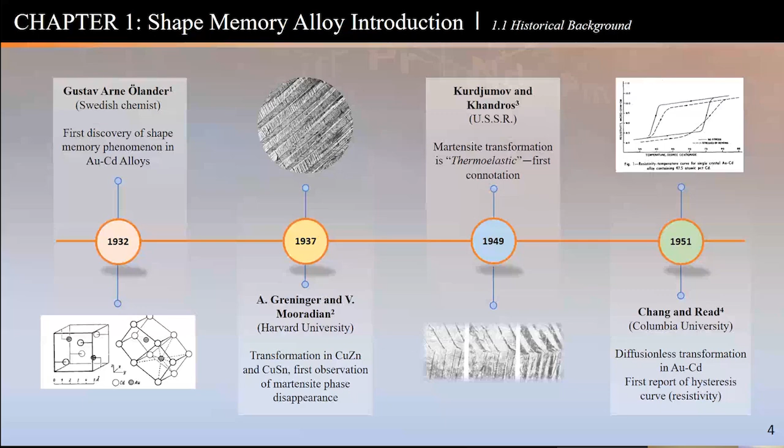First observation of these shape memory alloys was observed in gold cadmium alloys back in 1932. There were some advances as far as looking at the fundamental science, not really devices or components made out of these materials, but mostly scientific in nature, looking at what's happening in the microstructure or the mechanical response, but nothing designed yet.

So in 1937, there are a couple of different things in between years here, so I'm just highlighting some of the key aspects of these materials. Later on, as I describe what shape memory alloys are, you'll probably relate back to these authors that started it all back in the days.

You can see here that back in 1949, and the reason I choose different countries is to show you that the whole world was looking into these things back in the 1940s. These days we call them shape memory alloys, but a lot of people call them thermoelastics. Turns out that in 1949 was the first time the word thermoelastic was used, and I will describe that to you as we dive into it.

Then in 1951, there was the very first observation of this nature of curves here. These curves you've probably seen in the past, called hysteresis curves, basically a load or some sort of response as a function of temperature. That's what's used to describe shape memory alloys in the first place.

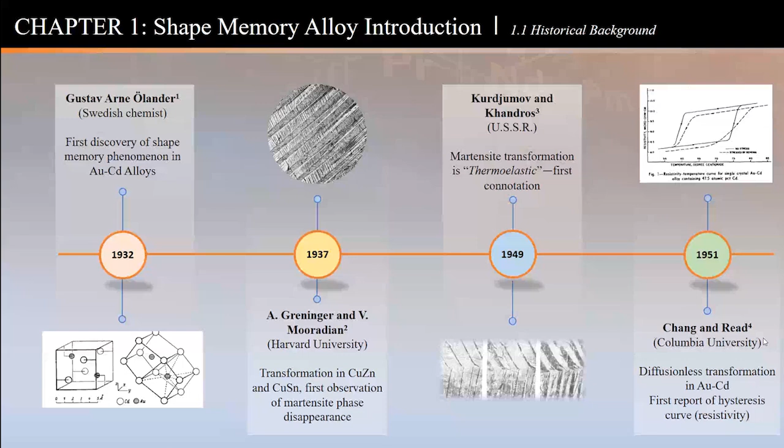So that was the very first observation or test conducted to show that you can get this dimensional change as you heat and cool. You get this envelope, this dimensional change in a gold cadmium alloy, also using resistivity. But then there was a major change here in the late 50s, early 60s.

Here's a picture of a gentleman by the name of William Buehler. He was working at a naval ordnance lab, and he was tasked with working on a lot of intermetallics, not shape memory alloys in specific. He made a number of different alloys, a number of different combinations.

One of those combinations was a nickel and titanium mixture, which created the very first nickel titanium alloy, also known as nitinol, for Nickel Titanium Naval Ordnance Laboratory. And that was done by Buehler.

In fact, if you read some of his biographies, he describes it. People say that it was an accident that this happened back in the days, but he described it as not really an accident — it was a planned discovery. And I really like that sentence. He was not planning to work to find shape memory alloys, but through his research and work on similar alloys, he stumbled on the nickel titanium formulation.

On that, what they actually did back in the days was sound checks. They'd take a piece of bar and hit it with something and it rings. This nickel and titanium, when they hit it with a rod, rang differently — much different than the other metals he made.

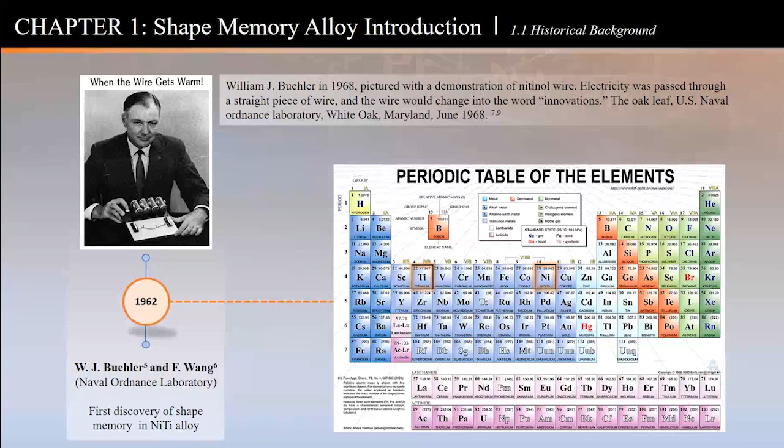They funded Goodyear and Battelle, and you can still find those reports out there. They did all kinds of characterization — thermal, mechanical, some of them magnetic, and all kinds of different tests. So after that, there were a number of different applications.

From my research, this is the very first space application that I was able to find, in the Nimbus spacecraft. It was actually a demonstration of moving these louvers using a shape memory alloy wire. So that was the first space application in 1968, or at least a demonstration.

In 1969, a group led by Andreasen designed these wires here, shape memory alloys for braces, and that was the very first medical application. After that, there were tons of different things that came up in the medical field.

This implant using what's known as superelastic alloys, which I'll describe in a minute, for orthodontic devices, was a major breakthrough until today. These are being used - if any of you have braces, you might want to check with your doctor to see if they are shape memory or not. Most likely they will be nickel titanium alloy.

After that, there were a number of different applications. One of them is for space. In 1970 was the first recorded aeronautics application, if you will. This is on the aircraft, a coupler that they use, shape memory alloy, to fix pipes on an F-14. That goes on into 1986 and so on.

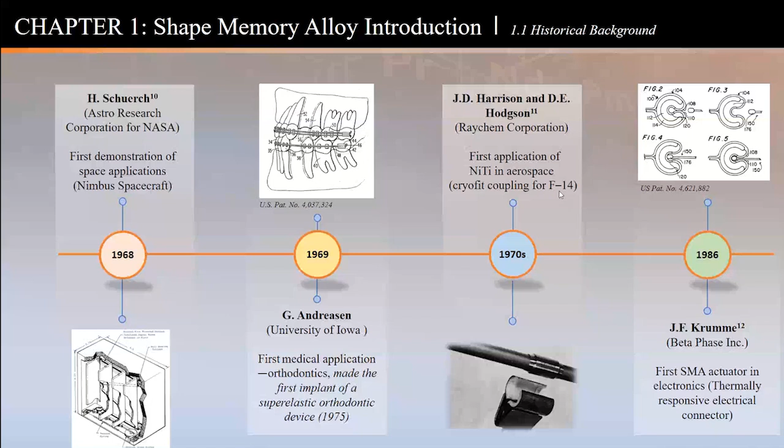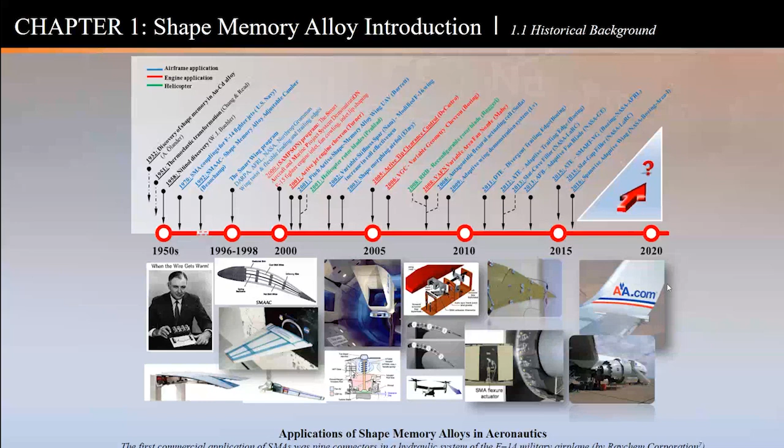I try to summarize them here from the beginning again in one chart. You can see there are tons of different applications, demonstrations, flight tests, wind tunnel tests in aeronautics up to today, 2020. There's also corresponding things for space - all kinds of different applications. Some are devices, some are demonstrations on all kinds of satellites, devices, probes. In fact, even now in the Mars rovers, I'll show you a picture later, they have shape memory alloys used for some deploying function or some sort of device.

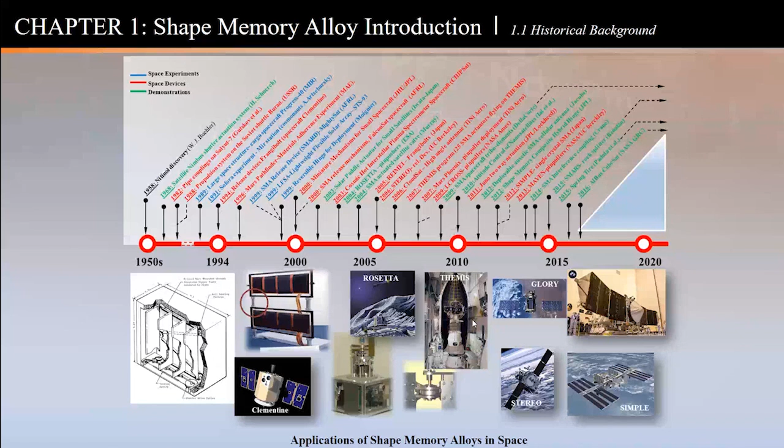So hopefully that gives you a quick rundown of when this started, back in the 1930s, with a major discovery in the 1950s by William Buehler at the Naval Ordnance Lab. From there, applications went left and right, using, I would say, a majority of nickel titanium, but as I'll show you later, there are all kinds of other formulations that people use or are using.

So what is a shape memory alloy? Look at the name - there is a shape, there is a memory, an alloy. An alloy here refers to just a metal, a mixture of different elements. But this alloy has a memory - the material can remember multiple states. It can go back and forth from one state to the other just by applying load, temperature, or some other stimulus.

Now imagine you have a cube of ice that goes to water - that's a phase transformation, going from a solid to a liquid. Shape memory alloys are similar - they go through a phase transformation, but this is solid to another kind of solid. There is no melting involved. It's just like if you have a cube of ice that goes to a triangular piece of ice without melting, just by applying a load or heat or some other means of inducing such a transformation.

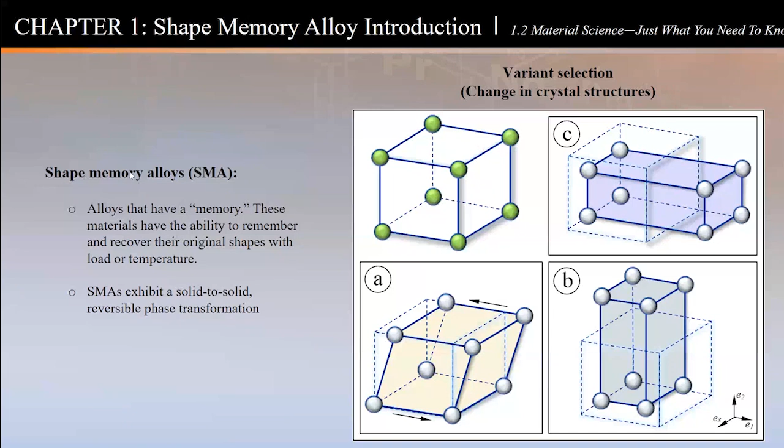Let's look at what gives it that unique property. I was describing elastic and plastic. Just to recap here, in plastic deformation, it's permanent.

So now think about these blocks I have shown, and I have a little square to show you the parent phase, that austenite phase again. So when you apply heat, or deform it, or cool it, or deform it, it goes to this sheared kind of geometry.

So when I load and unload, or heat and cool, and so on, I go from this little representation of the cubic austenite phase to this little representation of some other lower symmetry martensite phase.

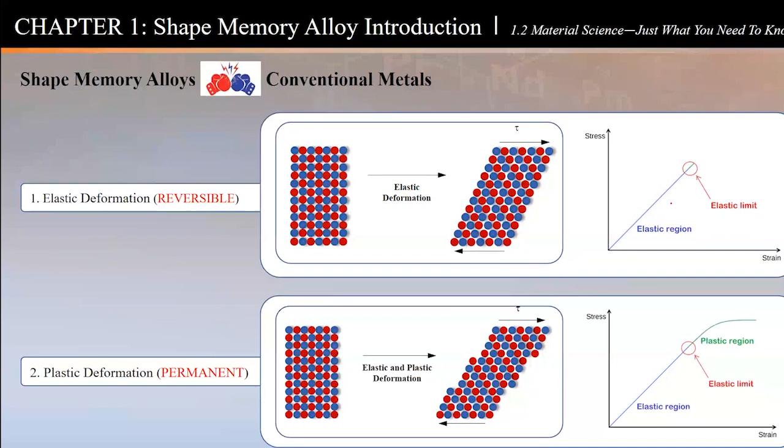So this recovery could be in the order of 10 times more than the elastic portion of your conventional metal. A conventional metal, aluminum for example, you can deform it 0.6%, and that's all reversible. This shape memory alloy, you can deform it 10 times that, 6% fully reversible strain. And that's the power of shape memory alloys.

So keep this principle in mind: this is reversible, and it happens via a phase change, a phase transformation from a higher symmetry parent austenite phase to a lower symmetry martensite phase. That's how this happens. Here's a quick picture for you. Remember these little twins that you see here.

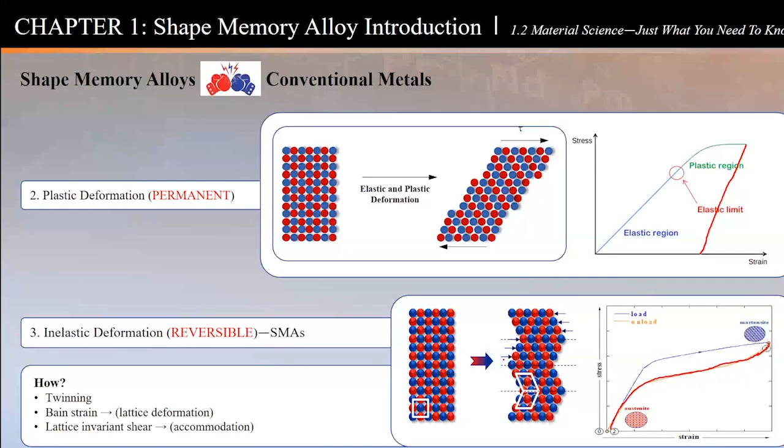So if we go in a microscope and look at the cold states in the lower symmetry, the martensite phase, here are those little ridges that I just showed you. You can see how they're going back and forth. This is actually a real microstructure. It looks like this. This is how it accommodates that deformation. You don't break a plane, they just go into these twin modes that you see here.

And now if I take this same metal, same microstructure, and I heat it up, what happens? It goes to the higher symmetry austenite parent phase. And this is the microstructure of the same material. You can see, just like you have your conventional aluminum or steel, titanium, grains next to grains next to grains. Sometimes it's hard to believe this is the actual same exact material, just heat and cool between them. It goes from this to this.

And as this is done at a microscopic level, but the end result, if you take a component, because this little grain is going to here and the next one is going to here, you have a macroscopic deformation that is reversible, controlled by temperature or load or some other stimulus. So hopefully this gives you a good idea of what shape memory alloy from a microstructure level looks like, the terminology used to describe shape memory alloys, the austenite martensite, and why it is reversible.

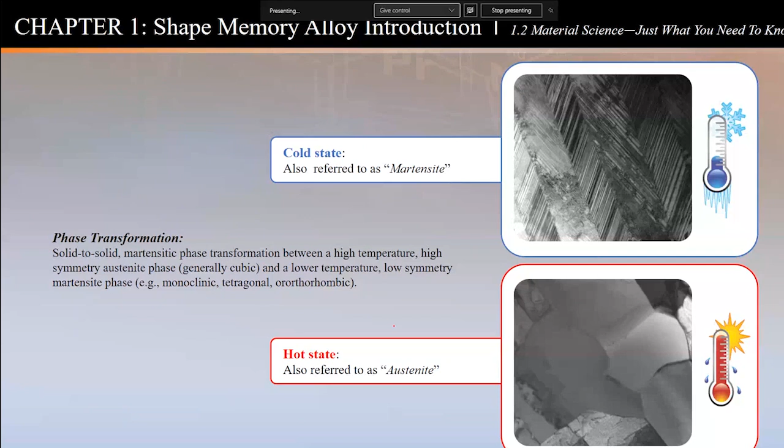Here is one version of the shape memory alloy, and I'm going to describe it here. So we start, hopefully you can see my little pen here. I'm at 0, I'm in slide 13. So we start from 0, and this is the austenite phase, and I just told you it's the parent phase and it's the cubic phase. I cool it under 0 stress, 0 load to 1. Nothing happens. It just accommodates this little square that you see into some twin mode that you see here. Nothing happens. No macroscopic changes because that twinning that's occurring is very small.

Now I'm going to take my piece of metal and deform it. I'm going to go from 1 to 2. If I didn't tell you anything about this material and I unload to 3, it could look like elastic plastic deformation, like you pull on a piece of steel. Okay, if I don't show you the bottom half here, just the blue curve, load to 2 and unload to 3, remove load. So this deformation, in the order of 6 or 7% in some alloys, is isothermal.

It's done at a constant temperature, say, for simplicity, let's say room temperature. If I go from 3 and now I heat this material, I apply heat. Once I apply heat, this material actually recovers. It goes back to 0. And in the process, as these phases are changing, the phase transformation is occurring. It goes from some sort of low symmetry microstructure to high symmetry. I recover all this deformation, just like the metal was never deformed before. So this mechanical deformation is recovered by this heating.

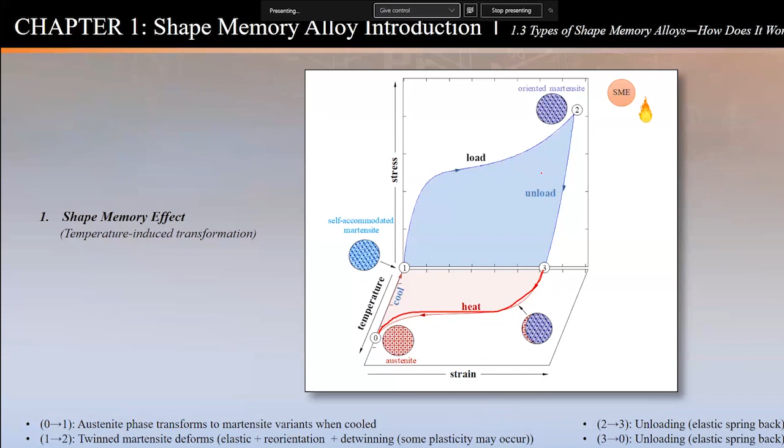So you have to apply heat for it to recover. It's known as the shape memory effect. Now, in the shape memory effect, if I take this plot here, this bottom curve, and just look at the 2D, forget about the 3D plot now. Let's start at room temperature right here. I'm right here. Now I start heating under a load. I take a piece of metal, I apply a load to it, 2, and I don't unload. I stay at 2. So this is a fully loaded metal or component, and then I heat.

As I heat, I go this way, and then I generate quite a bit of displacement. Where is it going? It's going to the austenite parent phase, and when I cool, again, it follows the same path. Some of you may think that it follows the same path as it goes this way. Well, that's one way to do it. But actually in most shape memory alloys, the path that it takes is this way, and so on. I'm exaggerating this to show you what's happening in shape memory alloys. So how does it start first? Let's go back to the red.

To the red here, and when we start heating, we reach some critical temperature known as AS. Probably some of you may be guessing what AS stands for. So when I'm heating, I'm going to the austenite.

So I start my transformation and I go to AF. You can guess what AF stands for. AF stands for austenite finish - that's the end of my transformation.

So now I keep heating around here, nothing happens. No change in dimension. The strain could be displacement, could be twist, could be elongation, could be shrinking, whatever the component might do. Now when I'm cooling back up, I'm going to cool my material.

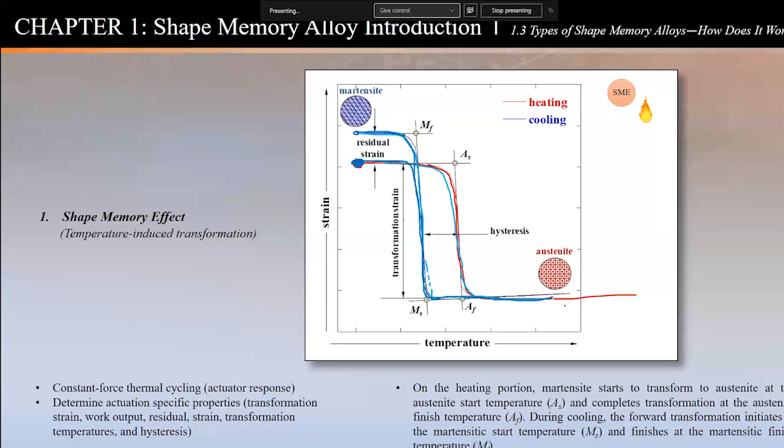This is just in a cartoonish way what it looks like between temperatures. Again, when I'm heating, I go through austenite start and finish - it goes to the austenite phase. And then when I'm cooling, it goes to martensite start and finish, and it goes to that lower symmetry twinned microstructure. Now the second type - the first type is shape memory effect.

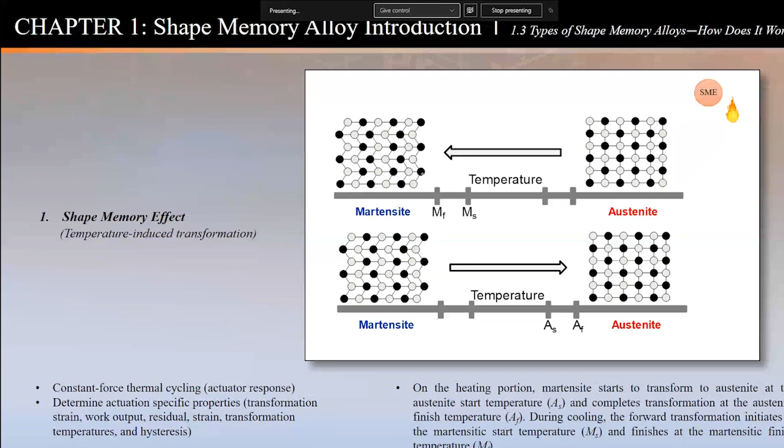I can change the material by applying heat. Not always the same - you can do it also by what's known as superelasticity. Some call it pseudoelasticity, I refer to it as SE. It stands for superelasticity or pseudoelasticity, and basically it's a stress-induced transformation. How does this happen?

Now I'm sitting at 0 here. My microstructure is austenitic, okay, cubic. I start loading this material. At some point it starts transforming to martensite, and then finishes the martensite. And then as I reverse the load, it comes back through this path, austenite, and then it finishes the austenite.

This is just by pull it and let it go, basically - load and unload. And this is fully reversible, what's known as superelasticity, also known as pseudoelasticity. The principle is the same - it's a phase change. It goes from this nice cube to the shear components, and once you unload, it goes back to this cube. So the underlying principle is exactly the same, except that this is triggered by load versus the shape memory effect, or SME, which is triggered by temperature.

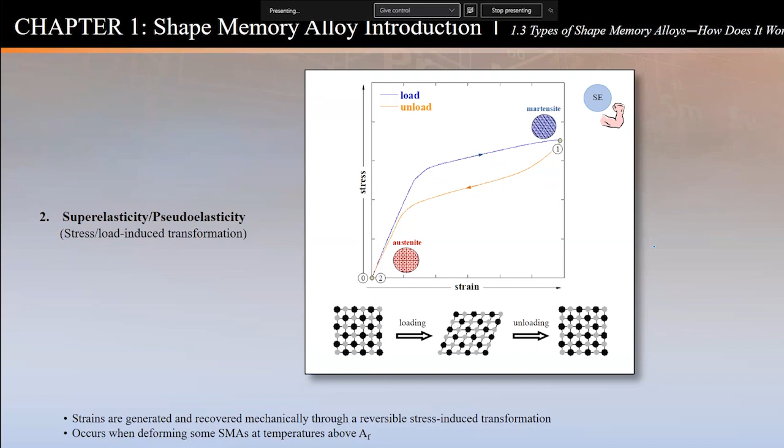Please, if you have any questions, let me know. There's another - I'm on slide 18 of your package. There's also other ways to move the shape memory alloys depending on the composition.

There is magnetic or ferromagnetic shape memory alloys that you can change the microstructure by applying or removing a magnetic field. This could be advantageous where we have a magnet available, or you can guess already that if you have, for example, a shape memory effect, you have to introduce heat and you have to remove heat. So that means time. A magnet you can turn on and off much easier, faster.

So this means you can choose one or the other depending on the application. If the application requires high frequency, you need to actuate or move something very quickly, maybe a magnetic shape memory alloy is the way to go. If you can afford a few seconds to heat and cool, or if you don't have a magnet, then you can use the shape memory effect. Or if none of them, if you have a place where you can apply load and remove load, then you use the superelasticity.

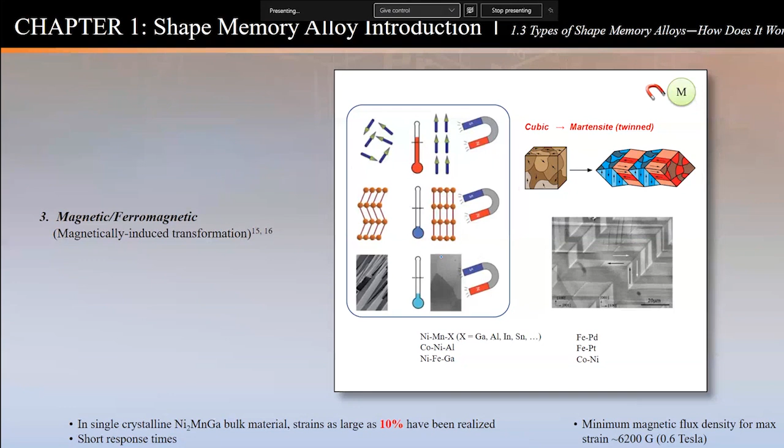And just for completeness and awareness, there are also shape memory polymers, the same kind of principle. You can heat them and cool them, but of course also you can introduce light. There are some neat principles of light-induced transformation, heat and cool. And for some very high temperatures, there's also shape memory ceramics, the same exact principle, but they're not metals, they are ceramics.

Okay, so that's about shape memory alloys, how they work, what types we have: magnetic, mechanical, polymers, ceramics, and so on. And here I wanted to introduce you how to form a shape. So how do you introduce that memory? Imagine you have a square and you want it to now remember to be a triangle. So you have to form it into a triangle.

So that process we call shape setting, okay? Or the good example is if you have a straight wire, but you want it to be formed into a spring, formed into a coil, like a helical spring. How do you do that? In the world of shape memory, we call it simply shape setting.

So if I take my metal and I apply some load to it, stretch it, just like this coupon shown here, and then I heat it under a constraint. So I hold it so it doesn't move, like in a jig or a platform, something that holds it in place. And then you heat it and cool it. Suddenly the new shape is this long shape.

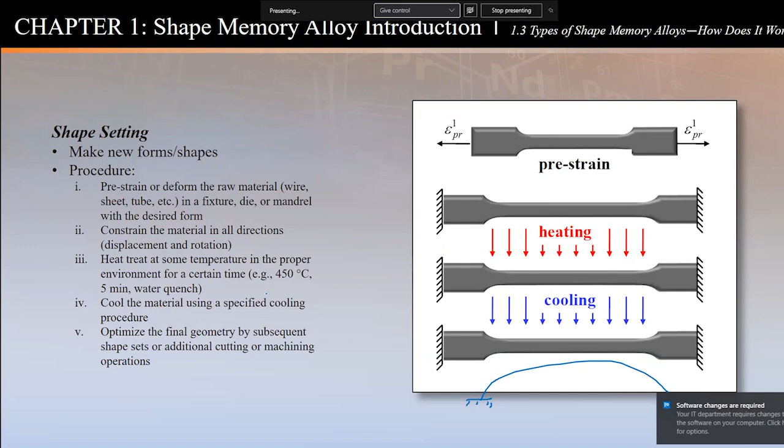And we do that also. Here's an example. For instance, these little springs were a piece of wire. We take little mandrels, cut some threads, wind this wire in there, put the sleeve to hold them in place, throw them in a furnace in the sleeve so they don't spool back out, heat them and cool them under some temperature environments and so on.

And finally, you have a new form of that wire. This wire now, if you apply a load to it, like a helical spring, it will shrink and contract and extend and so on and so forth. This is the simplest form of using shape setting procedure to create a new geometry, whether it's a spring or a beam or a triangle or whatever it is that you're trying to do.

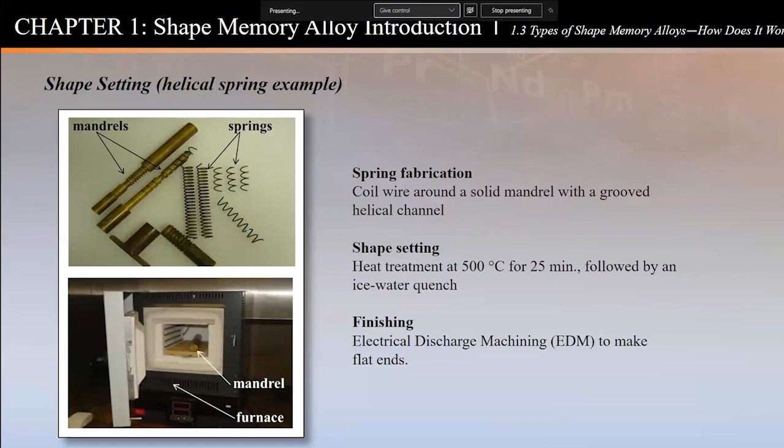Okay, so I just want to go through a few examples here before we start doing some exercises. Comparison: shape memory alloys, particularly the ones actuated by heat, shape memory effect, are prime users for actuators. An actuator basically is something that you can use to move or control a system. An example here: electric motor, a hydraulic system, a mechanical rack and pinion, and I put thermal here for SMA. SMA stands for shape memory alloys.

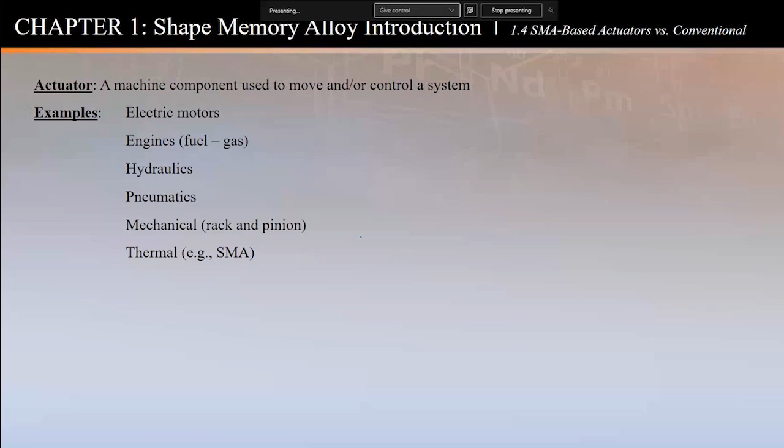Here is just a quick, simplified example of an electric motor. You need power, converter, cables, and so on to build the motor to move something from position A to position B. Here's another schematic of a pneumatic system, a hydraulic system, and these are what's required. And then you can go into a thermal system, which is shape memory alloy, that looks something like this. And what I'm trying to show here is that a shape memory alloy actuator can be a very simplified form, can be very lightweight, can be very compact, and do the function that your electric motor or hydraulic motors can do.

Now you have to trade it properly. You have to look at the other aspects. One thing is having a lightweight, compact actuator that costs a million dollars versus having a hydraulic motor that costs a hundred dollars. So there's cost weighing in there. There are other things you need to look at as far as life, maybe frequencies and so on. But in a general sense, where it makes sense, shape memory alloys are known to be very lightweight and very compact, that you can package in tiny places where having a motor like a pneumatic or hydraulic one, there's no hope of doing that anywhere.

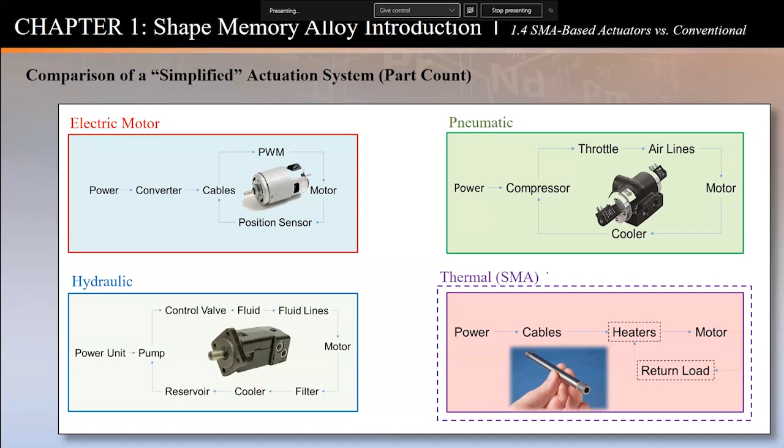So here's what I just described. One thing especially for us at NASA, for space applications, if you have some sort of deployment mechanism, if you're going to deploy a sail, a panel, a boom, or fairings, SMAs are debris-less and spark-free in operation. You can apply a signal and there's no sparking, no debris like you'd get with explosives or pyro devices to release things, and no shock from the explosion. That's a very neat benefit from having shape memory actuators do such a thing.

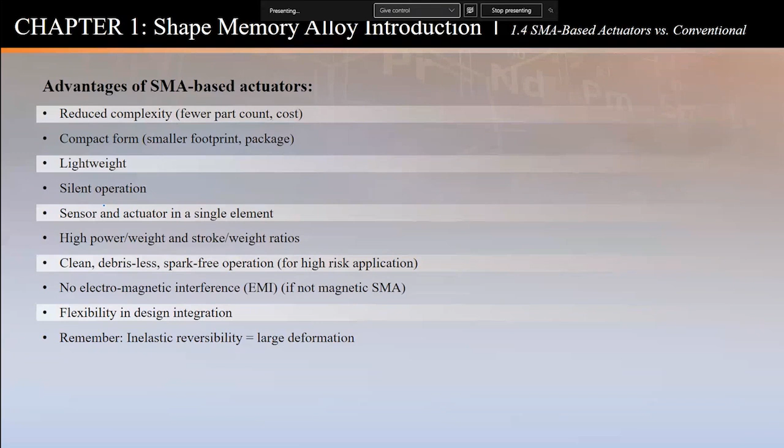Silent operation, you don't hear it. In fact, there are some cars in Europe that replace the mirror adjustment mechanism. When you adjust your mirror, you push that little button and you hear that zzz going on. Well, some high-end cars don't want to hear that, so they replace them with shape memory alloys, which are very silent. Again, is that the right application? I don't know, but it's there. Maybe there are some applications out there that require such quiet operation, and so on and so forth.

This is just a few screenshots here to show you the comparison of power-to-weight ratio as a function of weight. Again, in this example, the SMAs are down here. Weight-wise, they are very lightweight, and they can perform like many other actuators in its class. Of course, if you go up here to hydraulics, you get a lot more power, but you get heavier. So this shows that SMAs can be light and can still produce very high power.

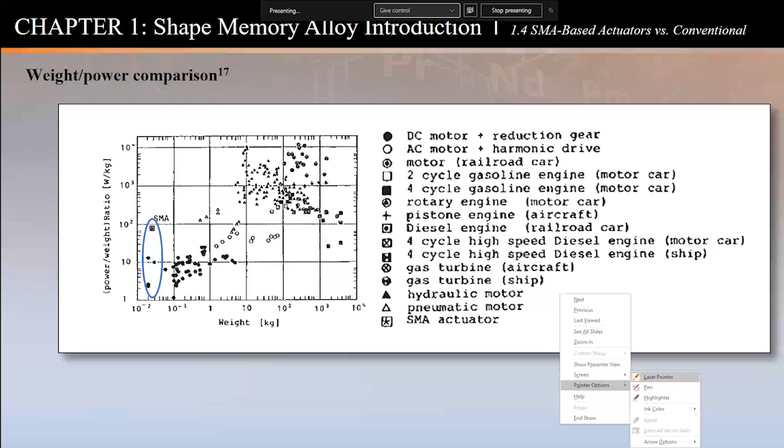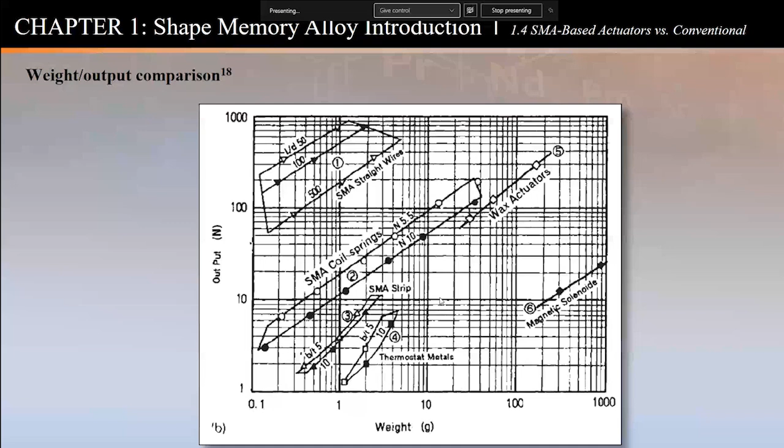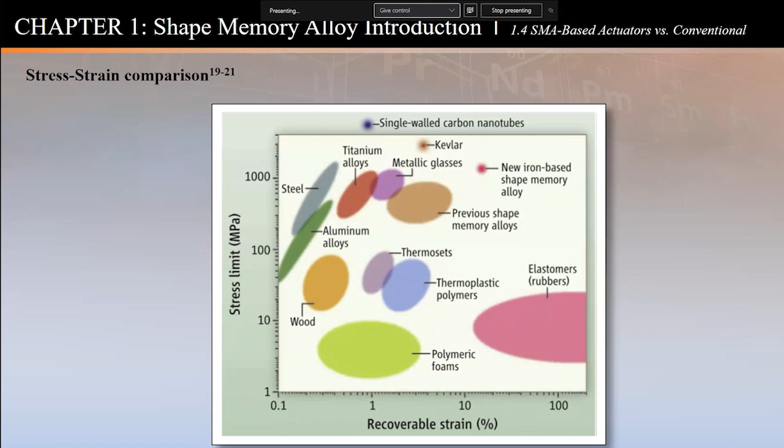You can switch a magnet on and off very fast versus nitinol, which is shape memory alloy, conventional nickel titanium. It gives you a lot higher specific energy, but at a knockdown on frequency. So this is something to keep in mind.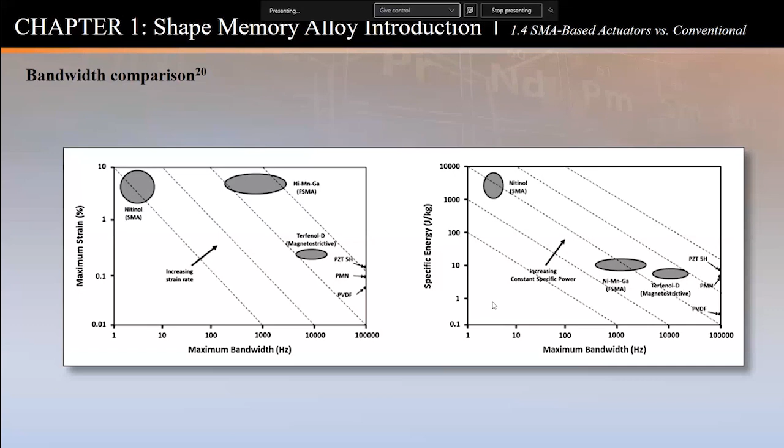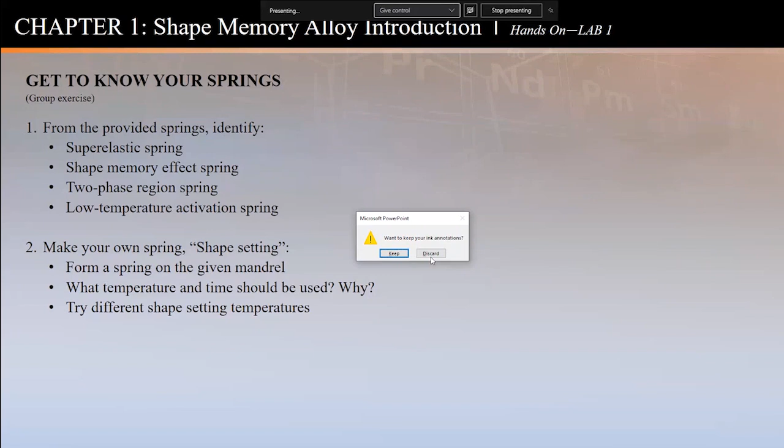So with that, I listed this, by the way, when I was going through the slide. When you see these numbers here, they refer to the original work, so you get a chance to go look at the whole story there. So I summarized them for you here. What I would like to do next, typically we have an exercise where you can build your own springs and stuff, but because we can't do that, I prepared this little document here where hopefully we can work together.

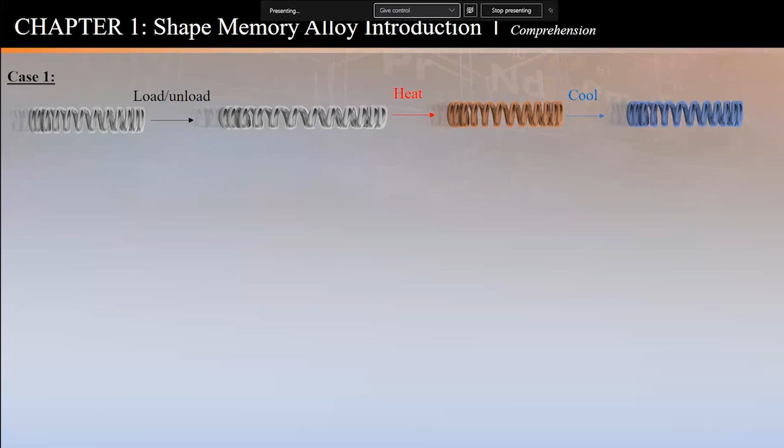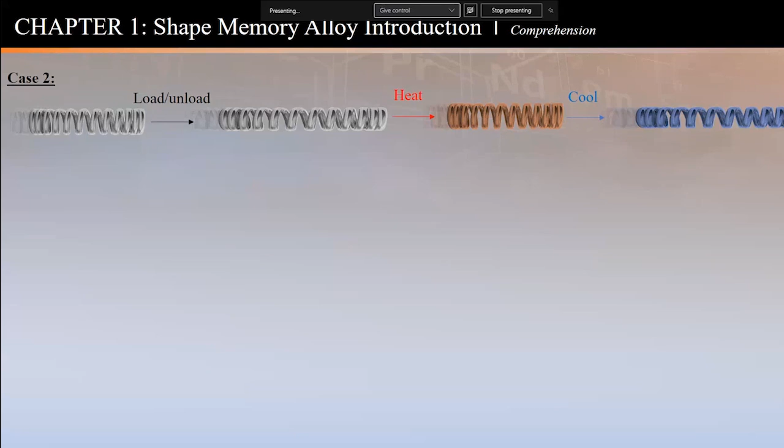It's the shape memory effect, which is the temperature-induced transformation, but there's a layer on top of it. It's called two-way. The previous one, if I take this spring and I cool it, well, nothing happens to it. Now, if under no load, under 0 applied load, I heat, it goes back to 0. Now I cool, it goes back to 1. Hopefully you can see my pointer. It actually behaves like an actuator here under 0 stress. This phenomena here is called two-way shape memory effect.

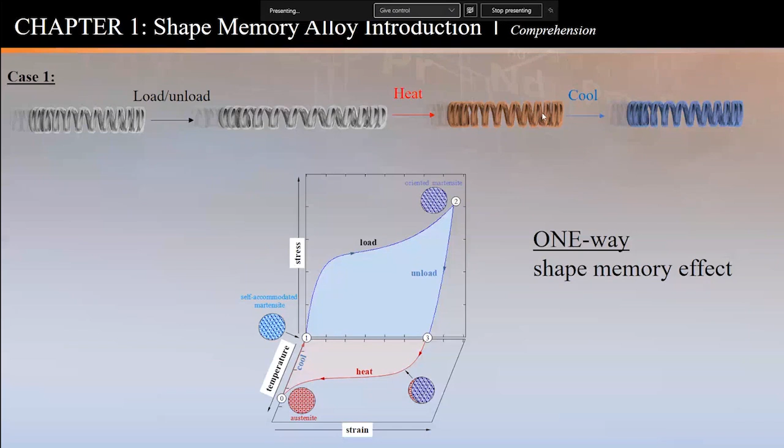The difference here is: one way, once you heat and cool under 0 stress, nothing happens. But in two-way, as you heat and cool under 0 stress or 0 load, it remembers two states. It remembers the cold state and it remembers the hot state. This phenomena is very useful when you have components with very little or 0 stress at all, and you want it to remember two states, like close a valve, open a valve with no load, or a switch or a breaker or what have you. So remember, this one is very useful. It's called two-way shape memory effect. It's also shape memory effect, but it has two memories versus one, if you will.

Good, let's go to this case here. Okay, now I'm going to load, but I'm going to keep that load. I'm not going to remove the load. And then I'm going to heat it and cool it. And then heat and cool.

The only difference between this one and the previous one is: the previous one is one-way shape memory effect, but here I'm biasing it. I'm applying an external load and I never remove it. Imagine you have a spring and you hang a dead weight on it - that's what I do in the classroom. If you heat and cool that spring, the dead weight goes up and down. So there is an external load applied to it.

Now in the two-way, there is no external load, but there is an internal load. So the principle is exactly the same: take a spring, hang a dead weight on it, heat it and cool it, and it stretches and comes back up. In two-way, imagine I chop off that dead weight and nothing is hanging, but the spring is still going up and down via two-way.

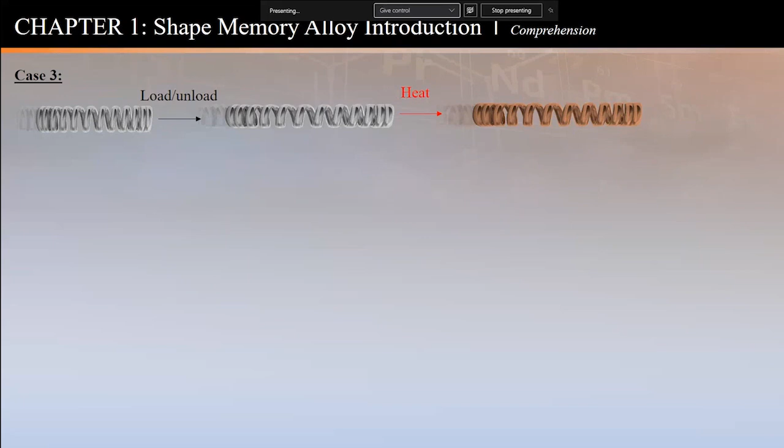So we'll go with plastic, and the answer is no. This is simply plastic deformation. It's not even a shape memory alloy, it's just a metal - that's how metals behave. You pull it past the elastic region into plastic deformation, you heat it or not, it's just gone plastic. There's no recovery. It's just an example to relate it back to what conventional metals look like. So it's not a shape memory alloy - there's no recovery, and the heat didn't do anything to it.

Can I ask you a question? Yes, you can. You talked about the one-way shape memory effect and the two-way - what's the difference? Is it a different material?

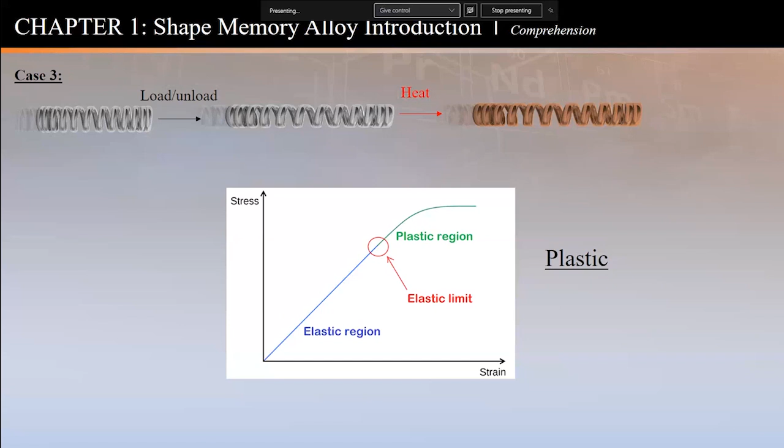No, this could be the same material. When you make a two-way, when you program or train or condition the material to remember a two-way, you have to condition it quite a bit. You have to apply some thermomechanical profile into the metal to create back stresses, internal stresses. So as you heat and cool, there's a stress on the grains that pushes it one way or the other. That stress is internal to the metal, and you have to do a lot to get that, versus one-way plus bias.

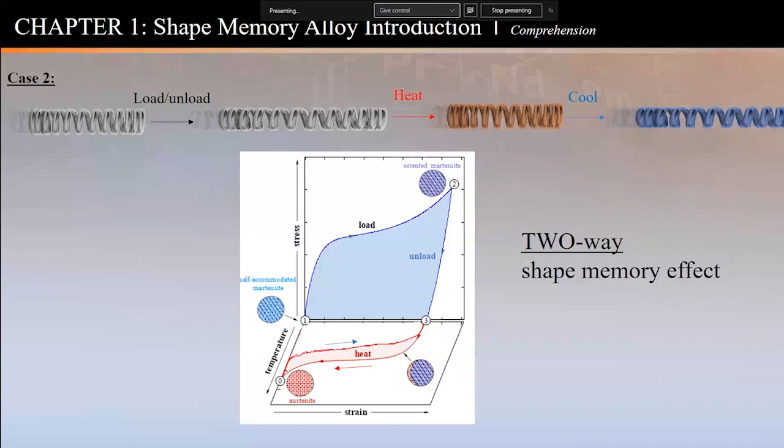If I had no bias, no applied load - and I'm in slide 33 now - if I have no applied load and I cool it, it stays the same length. But because I have an applied load, it forces it to stretch again, and when I heat it, it remembers home, and so on and so forth. But this relies on an external bias, an external force. Does that answer your question? Yes, thanks. You're welcome.

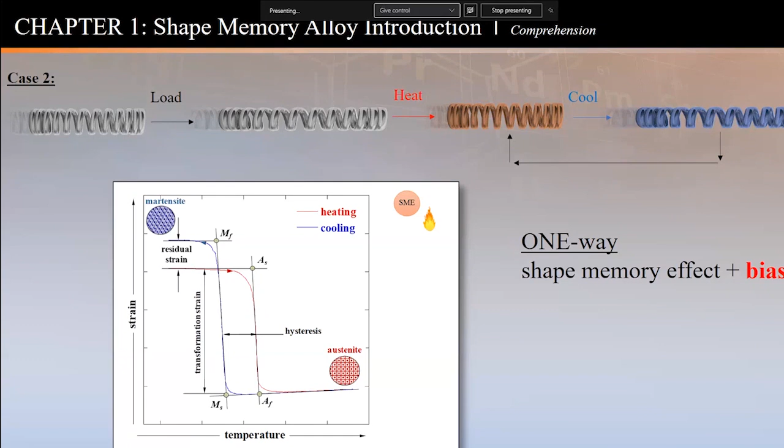Back to this example: I take a spring, I load it, stretch it like this, and then unload it, and it goes back to this condition. What do you think this phenomenon is? Just elastic. Very good - just pure elastic. You get your spring back.

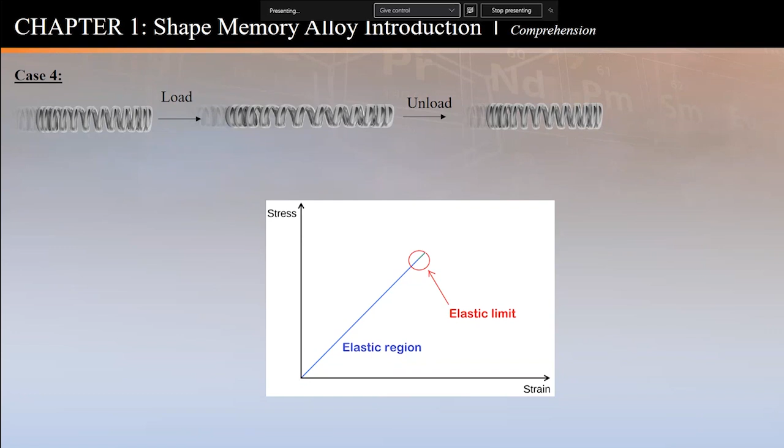Now, if I take it one step further - forget about this image, it's for a different example - if I take this spring and pull it ten times more than elastic, and unload it, and it comes back to the initial shape, what do you think this phenomenon is?

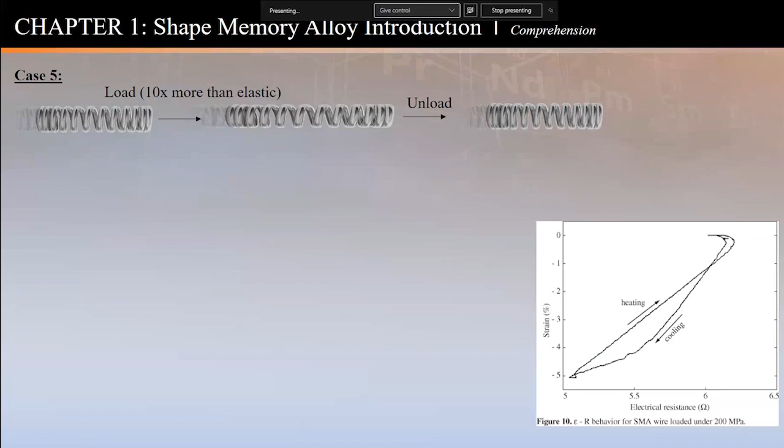Superelastic. So this is a superelastic example here. You pull it way past this nice straight line elastic region. You go all the way here, which looks like plastic, but it's not because it's a shape memory alloy. You unload and it goes back to shape. So this is superelastic. Wonderful.

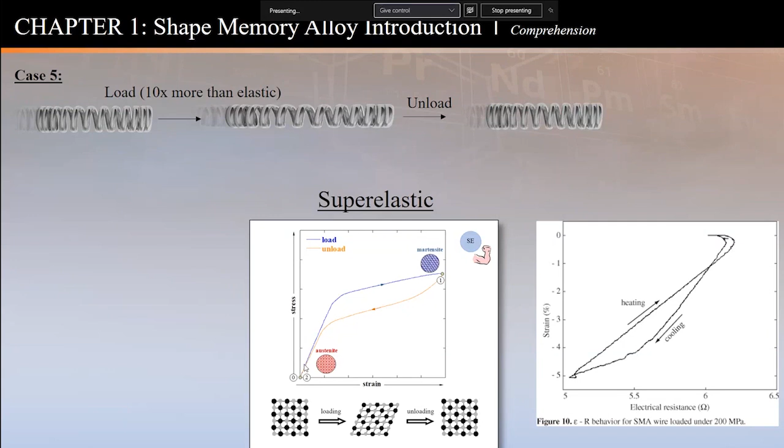Now I'm going to get a little more involved here. Let's look at this case. There's an alloy that I picked. It has an austenite finish temperature, AF, of 100 degrees C, and I'm going to load it at room temperature.

So now you've got to tell me which path, the top or the bottom. I'm going to load it at room temperature. Is it going to stay as is, or are we going to stretch following this curve? Stay stretched, yes, the answer is it will stay stretched because I'm past the elastic region. So this is not the answer.

Now it's stretched. Now I'm going to heat it up. Remember, my AF is 100 C, and I'm going to heat this to 80 degrees C. What's going to happen to this spring? Remember, we are on the bottom path here. Now I have two options again. As I heat to 80 degrees C, is it going to go back to the original shape, or is it going to stay stretched?

Top or bottom option? Top option, okay, any other guesses? I guess the only other guess will be the bottom. So if you said the top option, if I heat to 80 degrees C, it's going to shrink back to what it was before. And the answer is no.

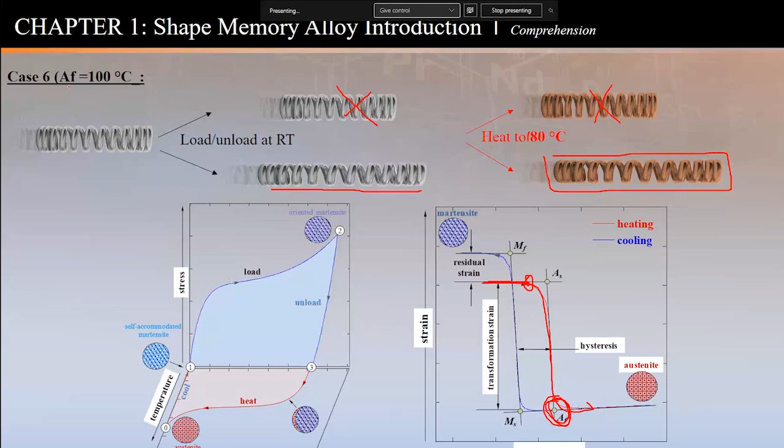That's what makes these temperatures critical. So now let's look at this example. AF is 0. Now my AF is 0. I have the spring, and I'm going to load it at room temperature, load and unload. Is it going to go here or here? Top or bottom option? Top option. So I'm going to take the spring, load it up, and remove the load, and it's going to go to the top option.

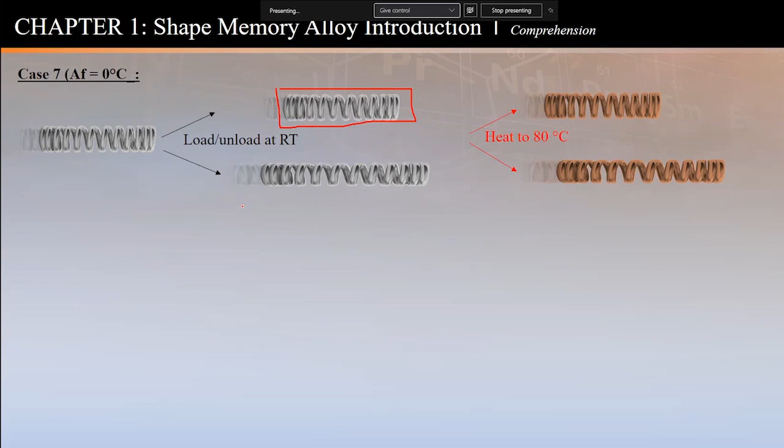And why is that? Difference in temperature? Not necessarily, but because it's superelastic. Superelasticity only exists above AF—well, 'only' is a strong word, but let's use it for today's exercise. You have to be above the transformation temperature, AF. With an AF of 0, I'm loading at room temperature, 25 degrees C or so, so I'm above AF, like you mentioned correctly. My material is superelastic.

Now I take the spring that shrunk back home, and I heat it to 80 degrees C. What's going to happen? Now we're here, either the top or the bottom option. Top option. And that is correct.

So let me sketch it out here, hopefully you can see this. Here's my curve, the heating curve. I said my AF is over here, and I'm at room temperature, so I'm pulling over here, deforming past the transformation. Even if I heat up and come here, nothing happens—it stays the same way because my transformation is already behind me, all done. That's what this exercise shows: if you are above the AF, you get superelasticity, and if you increase temperature further, you don't recover shape because it's already recovered. You don't get any dimensional changes.

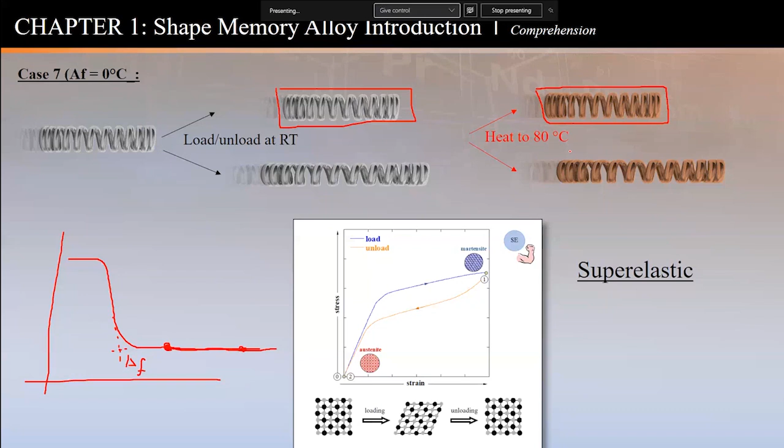So case number 8, my AF is 0 degrees C. I'm going to take a wire and deform it isothermally, at constant temperature, at the following temperatures: 20, then heat to 100 degrees C and deform, and go all the way to 300 degrees C and deform it. Now I'll put a line to guide you here with different shapes.

Now I would like you to participate and tell me, case one, what case is this? Let's start from the bottom left here. What case is this? 1, 2, or 3?

Two. And I'm not throwing a catch here, these are all shape memory alloys, so this is for real, all shape memory. Two, this is 2, okay?

What about this one? One, this one is 1. And this leaves us with 3. Okay, do we all agree? Is someone there that doesn't agree? Okay, and so everybody agrees.

Wonderful, so get this. Huh? I don't get it. They're all load temperatures above the AF temperature.

Okay, wonderful, I can explain. I promise you in a minute you will get it. But first of all, we all agreed, some of us agreed that this is the correct answer, and it's wrong. We're all wrong. So let me explain why.

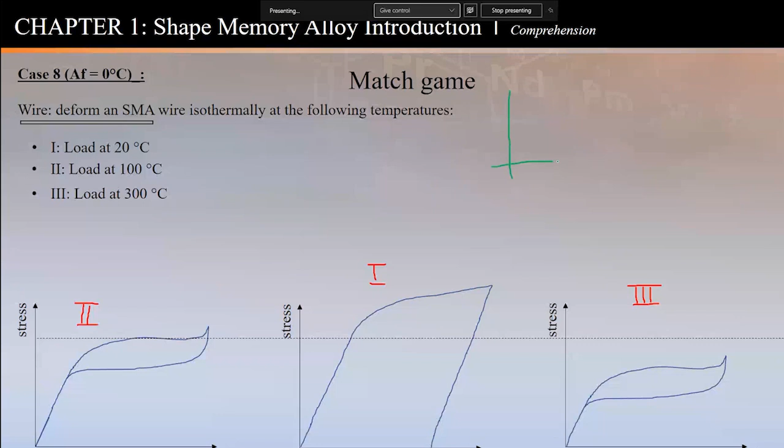So now I'm going to sketch a little curve here. Like you mentioned, I'm past the transformation, right? I'm going to stretch this guy all the way over here. You can see I like drawing - typically when I teach this in a classroom I like to use the board a lot. So let's say this is 1, 2, and 3, this is 20, 100, and 300, okay?

So now we're dealing with, this is AF, right? Here is my AF, I'm past the transformation temperature. There's my nice curve here. When I'm past the transformation temperature AF, I'm super elastic, right? So if I take and pull this sample right here, what do I actually get? I get this one - this is my case 1. I get a super elastic nature that looks like this, with recovery.

Now, if I go to higher temperature - this is case 1, this is case 2 - if I go to higher temperature, what happens is this plateau, this kind of shape, goes higher. This is my case 2, which is correct. So you see how this plateau is increasing. If I go to slightly higher temperature, this plateau is going to be increasing and increasing.

What it means - remember what happens here when I go past this line and I bend? A phase transformation happens, I change my austenite to martensite. As I increase the temperature, I make it a little bit more difficult for that austenite to martensite to transform, which means I need more load. I need extra load to make that austenite transform to martensite. So I have to apply extra load, therefore this one is increasing up, going up. Do you see this curve is lower, referring to this dashed line, and this curve has moved?

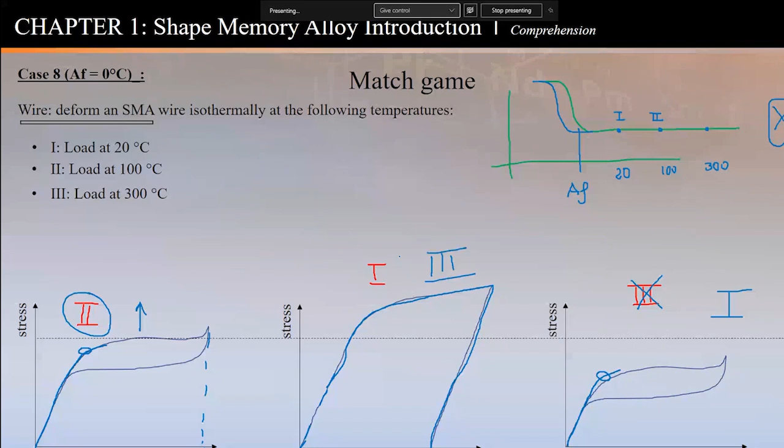There is shape memory effect and there's superelasticity. And now I'm going to confuse you and tell you they are really the same material. It just depends where you apply it. And that's what I'm trying to demonstrate with this picture here.

Imagine my AF here, 0 degrees C. Let me try to sketch it here quickly. Here's my AF, and it's 0C. If I go below it, if I cool here, I reach this point, which is martensite start, and then I change my dimension, and it becomes martensite finish, and then I'm fully martensitic.

What happens when you're fully martensitic? We're down here. When you load and you unload and then you heat, you recover. So this is what I told you, the shape memory effect—you load and you can get the shape back by heat.

A minute ago, I showed you this schematic here. If I take the material and I load here versus here versus here and so on, I get this shape—I get a superelastic curve, a nice superelastic curve.

If I move higher in temperature, that cubic structure, that austenite structure, needs more energy to convert to martensite, so I need higher load. And I keep heating, higher temperature, I need much more load to do that. And suddenly, after a critical temperature known as the MD, martensite desist, the energy to phase transform is higher than the energy to plastically deform.

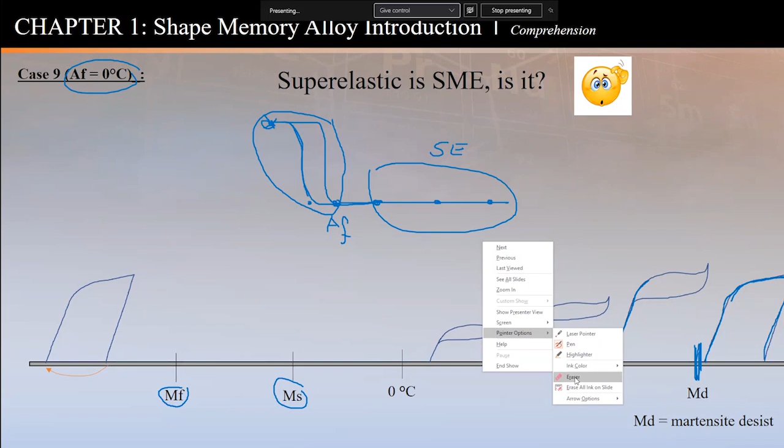Okay, so here is why, and this goes into the material science part of things. If I take nickel and titanium that I mentioned before, and I add nickel or remove nickel—50-50 is here, for example, 50% nickel, I take 5 grams of nickel and 5 grams of titanium, mix them together—that shape memory alloy gives me a transformation temperature MS, martensite start, of say 340 Kelvin, for example.

Okay, I'm here. But let's say I need to change where the material is activated—I need to activate down here. What we do is simply add nickel, more nickel. Now my MS is down here, 250.

So what I mean is, if I need an actuator that needs to function in a cold place like a moon crater somewhere, at -50 or -40 degrees C, my actuator can be designed with this amount of nickel. If I'm going to be somewhere like under the hood of a car where it gets hot, not cold, I can design my alloy with 49% nickel or whatever, and create an alloy that transforms at a higher temperature.

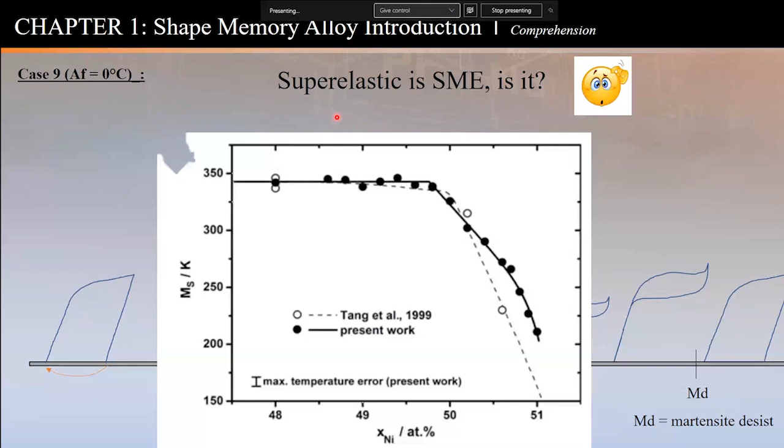So this is the game we play in alloy development, and the simplest of them is nickel and titanium. Typically, we add a third or fourth element to tune this transformation temperature to a desired application. So if your application requires activation at 200 degrees C, we can add some element to move this line up and provide an alloy that activates at those temperatures. That is the reason for having both elements.